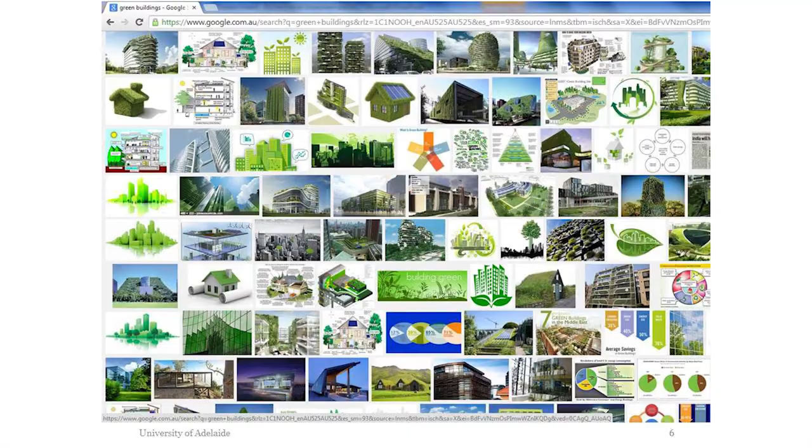But the interesting thing is, once I click images, of course, everything turned green. And you see that people say, okay, if you put plants on your facade, that is called green building. Anything green is green building. Well, is that so? Is that really what green building means? I believe that most of you probably are aware what sort of area the term is referring to. So I guess the idea of building something that is responsive to the environment and creating spaces that are suitable for occupants without leaving much negative impact on the environment is not really anything new.

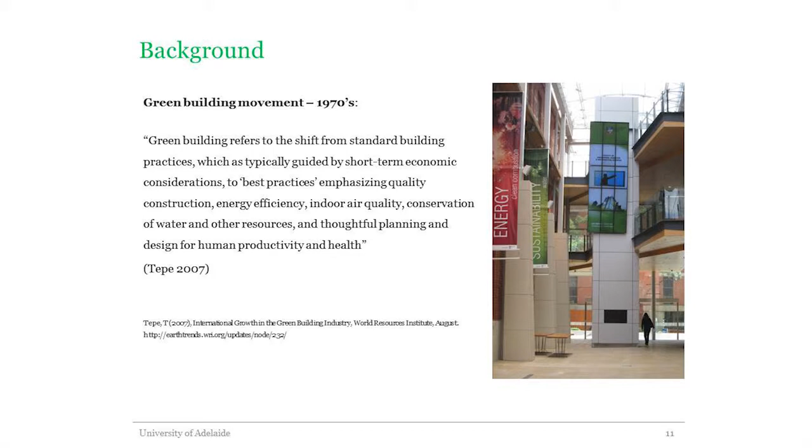At around that time came a realization that if we don't try to minimize the need for oil, we could suffer. And the green building movement started about the same time, when a number of countries realized that unless we change the way we build, there's a lot of impact on the environment, and we keep needing more and more oil.

So the idea of green building is really a shift from standard building practices, typically guided by short-term economic consideration, to best practices emphasizing quality construction, improving energy efficiency, improving indoor air quality, conserving water and other resources through thoughtful planning and design for human productivity and health. So it's not just about building with plants. I think it's more holistic than that.

It's looking at the life cycle of the building, from construction to use to demolition to reuse, by considering environmental and social impacts. However, I personally would say it should not be just environmental and social impacts. Economic considerations should also be put into the equation. And that is probably one of the debates: is it really green if we do it at all costs? My answer is, it should not be.

But to reiterate, green building is a label applied to a building that is designed, constructed, and operated in a way that uses resources efficiently and reduces negative impact on the natural environment while providing a healthy condition for the occupants. So the occupants are as important as the impact on the environment. It's not just about reducing the impact on the environment.

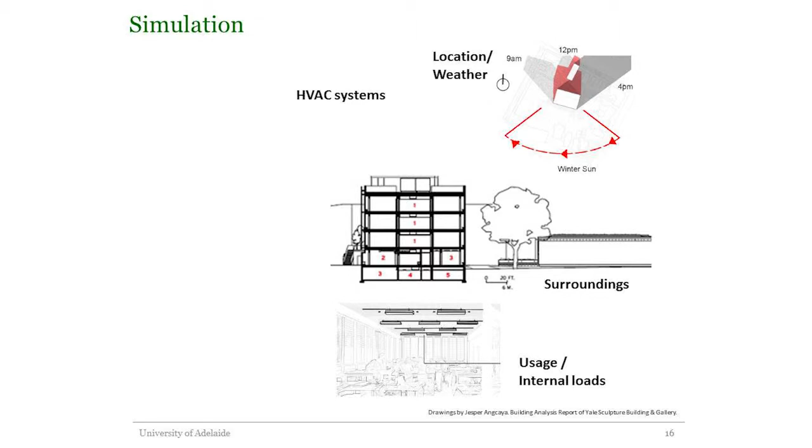You need to tell the simulation program where the building is, because that brings the weather information, because how a building performs depends on the weather condition. The surroundings, so you have to know whether it's surrounded by other buildings, by trees, is there any road around it, water bodies, and so on. You need to say what the building will be used for, how many people, lighting, equipment, anything that is affecting the internal condition, materials around the building and inside the building, so the building envelope and so on.

And if the building uses a heating and cooling system, then you also need to say what system is being used and how they are going to use it. All of these will be taken into account in the prediction. Then you can predict, based on all of these parameters, what is the condition in the building, if they need to be air conditioned, how much energy will be used for heating and cooling, how much water will be used, and so on and so forth.

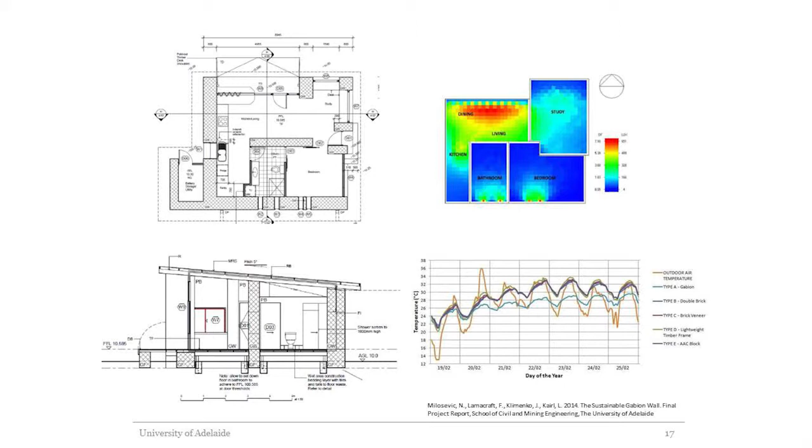Just as an example of a simulation. This is actually a student project. I think the owner of this work is in the room, so thank you for letting me use this project. This is a group of honours students from architectural engineering recently looking at using a Gabion wall for a house. Is it possible to use a Gabion wall for a house? Using simulation, they can predict the temperature in the house, lighting level, all sorts of other things. That's an illustration of what can come out of the simulation, and you can compare different kinds of materials.

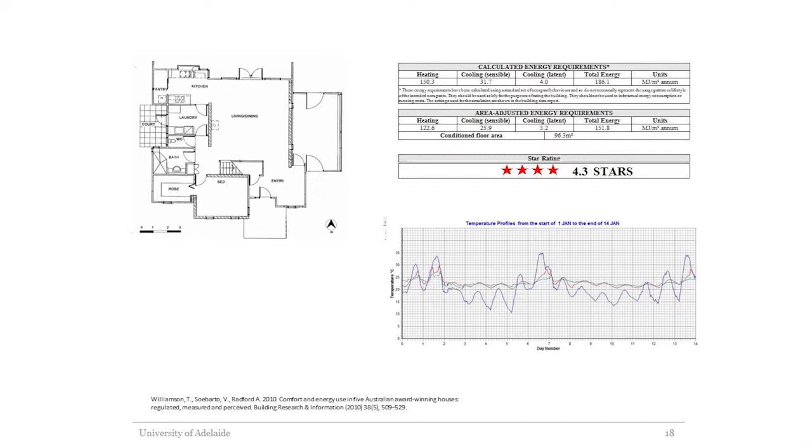The rating that I mentioned before, if you look at the actual output, it looks something like this. You enter all these building properties and how it's used, and it comes up with the predicted heating and cooling load, and it gives you the star rating. The star rating is based on a band of 1 to 10. It has certain values, then it gives you the star rating. Also, you can predict the temperature in the building if it's not air conditioned.

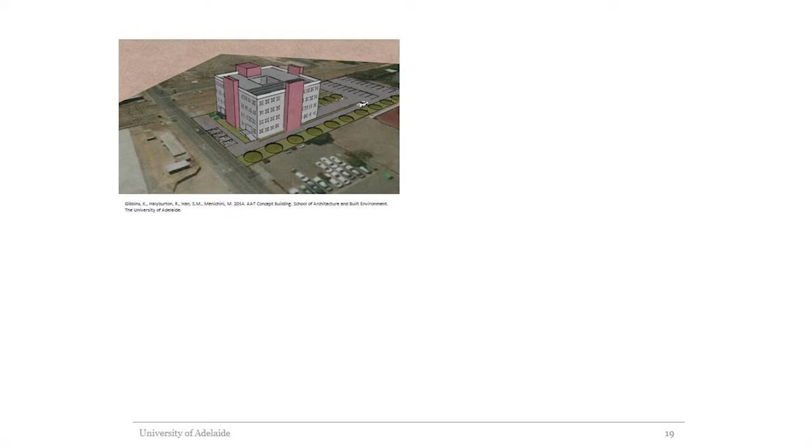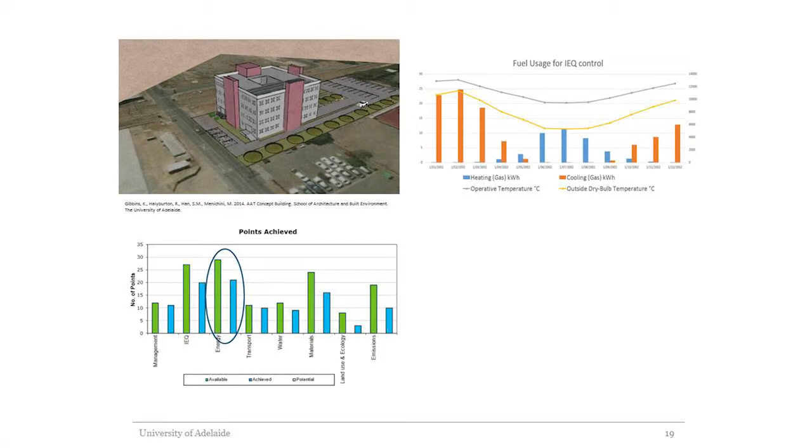In a commercial building, you can also simulate a similar thing. Once again, this is a student project from last year where they simulated an office building using a program called DesignBuilder. What you can predict, for example, is monthly electricity and monthly gas use. This will then be used to predict the Green Star rating performance. Now, Green Star, just quickly, is not just about energy. There are other aspects that are assessed: management, indoor air quality, transport, water, materials. But energy does play a big role.

So the simulation is fed into the Green Star rating, and with all of the other assessments, a building design will be awarded a star rating, whether it's 5 or 6, 4, and so on. So that's it in a nutshell. Once again, all of those star ratings that we heard about are not real performance, it's predicted performance. So we are interested in looking at, is predicted green the same as actual green?

About 2 years ago, one of our PhD students conducted this research. Now, studies confirming the greenness of claimed-to-be-green buildings are not new. There have been studies around the world, and the outcome is not conclusive. Sometimes they find green buildings perform better than non-green buildings, sometimes not. This study is the first in Adelaide, as far as we know, to look at the performance of Green Star rated commercial office buildings and conventional buildings, which are not Green Star rated. But because there are a lot of factors in Green Star assessment, there's no time to look at every single one.

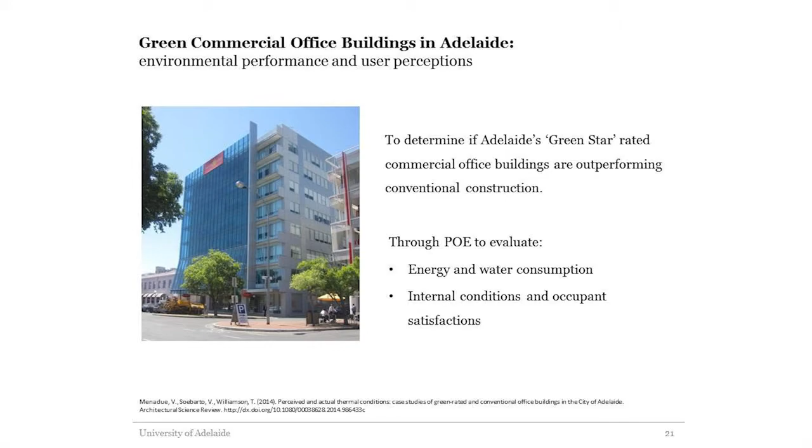The study focused on the energy and water consumption, as well as the indoor air aspects, and as well as the occupant. Because once again, if you remember the definition of Green Star, green building is not just about the environmental aspect, but social aspect is important. So she looked at also the occupant satisfaction. The work was done through monitoring. So there's monitoring of the indoor condition, temperature, humidity, lighting, actually also noise level.

Looking at 4 conventional buildings, 4 Green Star rated buildings, and 1 green intention. Now you probably say, gee, that's not many. It is a big challenge to find buildings that wanted to participate. Letters were sent to many buildings, and not many wanted to, I suppose, be known how the buildings actually perform, possibly. But also they don't want the occupants to be disturbed by the study.

We were helped quite significantly by the Department of Premier and Cabinet, which was very helpful. And we had 9 offices participate from the government, and they all, luckily, were in conventional buildings as well as Green Star rated buildings, so we had a comparison of that. There is one building called Green Intention. Now this one was a building that was perceived or looked like it's kind of green, but it's not rated officially. But from publications about this building, it seemed to be green, quote unquote.

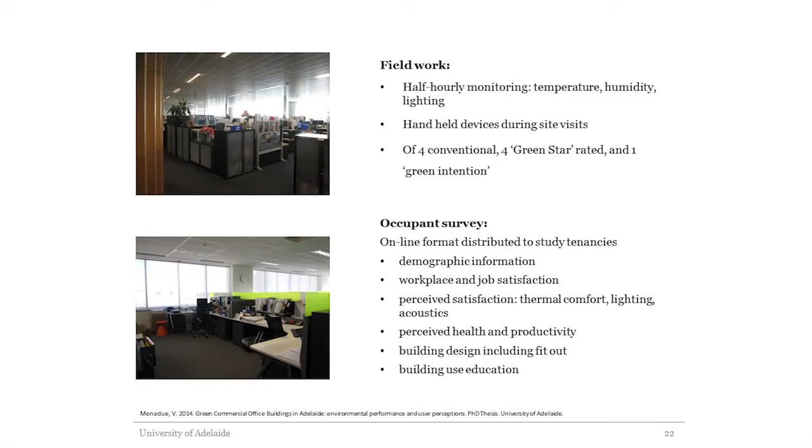Once we gathered the buildings that were willing to participate, then she conducted the occupant survey. More than 600 people participated, so it's quite a large number of people. And basically, the questions included job satisfaction, workplace, perceived satisfaction of comfort, lighting, acoustics, health, productivity, building design, as well as building use education.

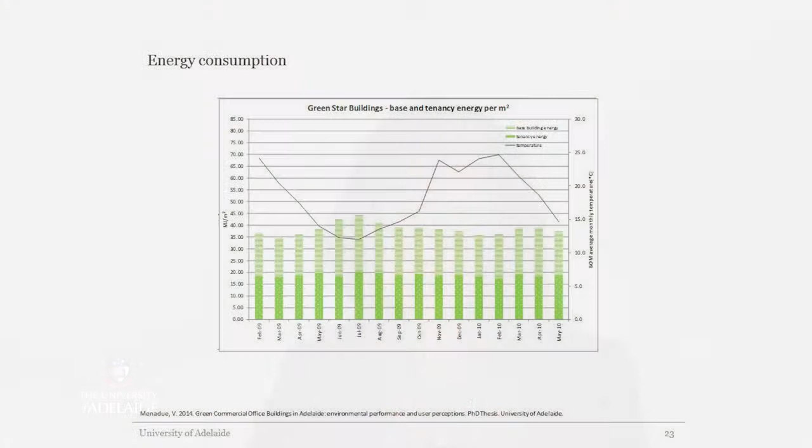and that's the Green Star rated building. So it's quite pleasing, I suppose, to see that the Green Star buildings use approximately half of the conventional building. The line plot is looking at the temperature. So as you can see, when the temperature is quite low, which is the winter, that's when apparently the higher energy. We'll look at this data in a different way. So apologies to those of you who don't really like Excel, but we like Excel.

And it was the same with the green building, but once again, as you can see, it's half of what we found in the conventional building. But similarly, total energy consumption is actually higher in winter than in summer. Interestingly, the green intention building was not too bad. I mean, it's only slightly higher than the Green Star rated building, despite the fact it's not officially rated with Green Star.

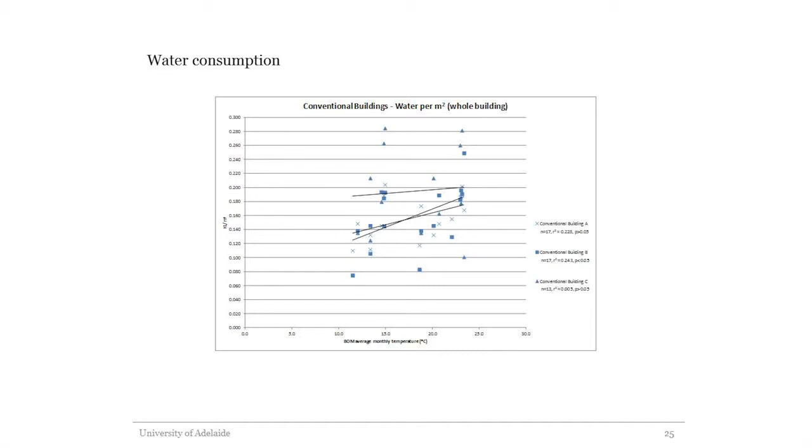And then we look at water, same thing. This is the water consumption in the conventional building, and the Green Star rated building also uses less water, showing that the water is more efficient also for the cooling season. So often water is used for the cooling system, but in Green Star buildings they use much less. Interestingly, the green intention building has less water per square meter, and in this building water is not much used

for the cooling system. Okay, so in those two aspects, we could confirm that the Green Star rated building actually performed better than the conventional buildings. Now look at the people's perception. There are many aspects of this, so these are just some of them. The report actually goes pages after pages, and I just picked some of these.

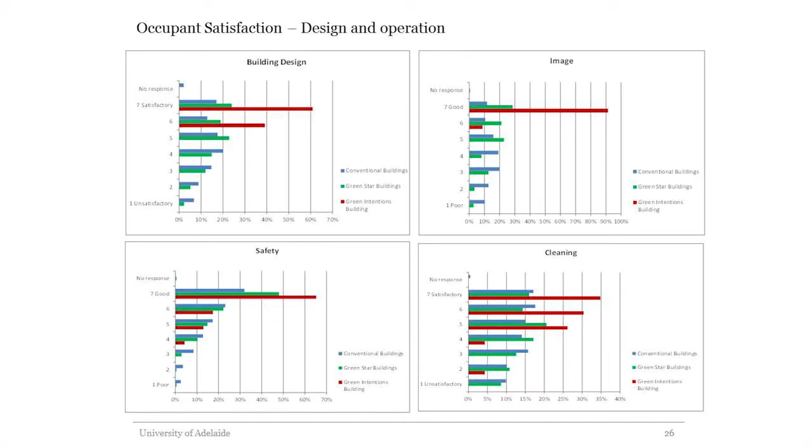So in terms of building design, the scale here shows unsatisfactory as the lower scale, and then 7 is actually the highest or the most satisfactory, or the good and the poor. The green indicates the green building, the blue is the conventional building, and the red is the green intention building. So in terms of building design, overall, the response that the building is quite nice and we like the building, we have a better response for the green building.

So occupants in the green buildings feel that the building is more satisfactory in terms of how it looks, how they use it, and so on. It has a better image and also provides better safety. But once you look down here, for some of them the conventional building is similar to the Green Star building.

Interestingly, in terms of cleaning, most of the occupants in the Green Star buildings don't think that the building is as clean as they wanted. We don't know why, but the conventional building seems to perform better in terms of the cleanliness of the building.

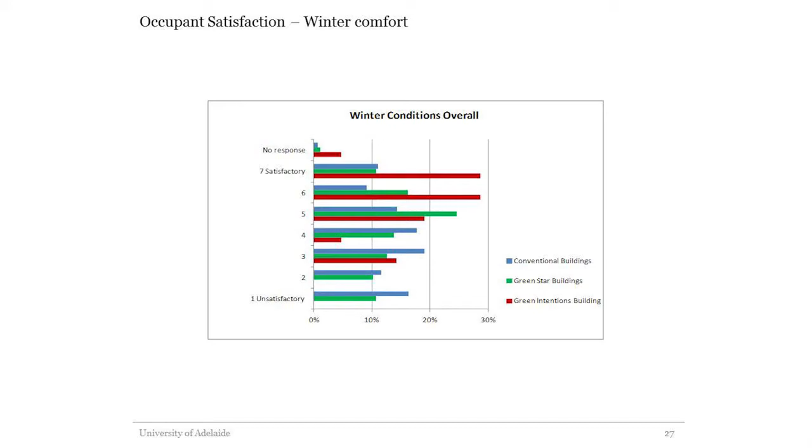And then we look at other things, for example, the winter conditions. In this case, we found that the satisfaction is kind of similar. So if we look from the 4, which is the middle point, and above, the conventional building performed better in that score, as well as at 7, but between the 5 and 6, the Green Star performs better. So if you total it, it performs relatively similarly.

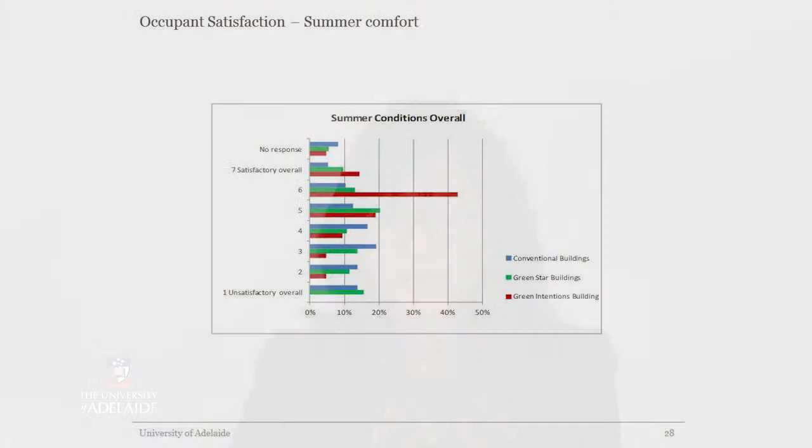Summer, however, the Green Star rated building performed better. So people perceive the summer condition in the Green Star building as better than in the conventional building.

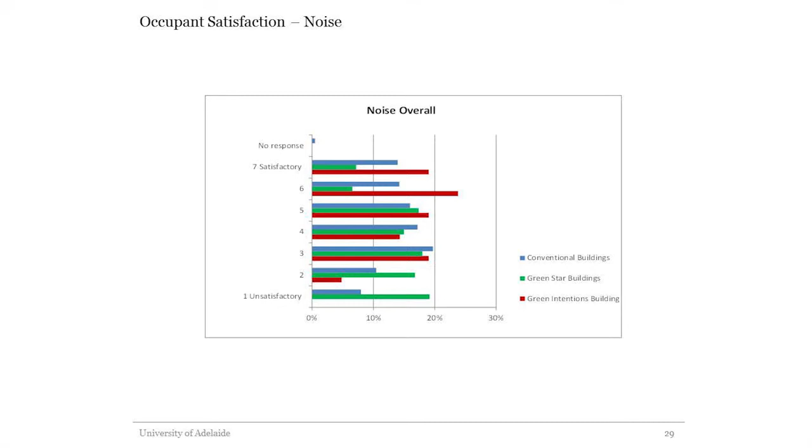Noise, however, is a big issue, and this is not unique to the findings in the Adelaide study. Studies around the world show this for a lot of office buildings under schemes similar to Green Star. In America, it's called LEED. In the UK, it's called BREEAM, a similar scheme. Noise is often an issue in Green Star rated commercial buildings, and that is because most of these buildings try to minimize the energy for lighting. What happens? There are big windows and fewer partitions. And when you have fewer partitions, office buildings tend to be quite noisy.

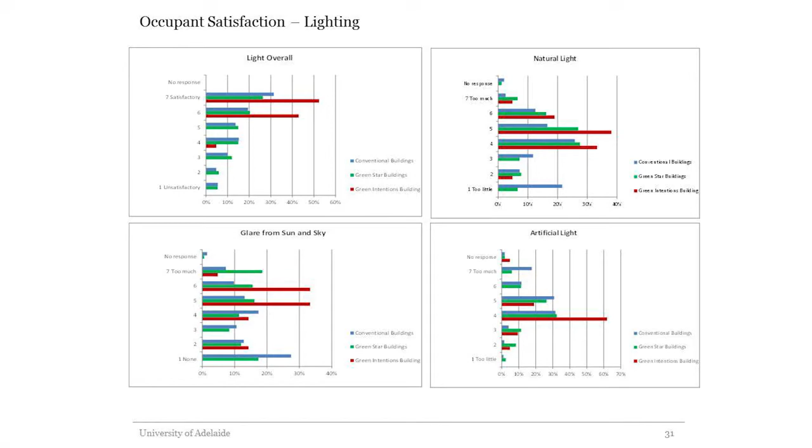I kind of skipped the green intention, but as you can see, the green intention buildings perform basically the best in terms of the occupants' satisfaction, which is quite interesting. In almost all areas they are more satisfactory than the other two, despite the fact, once again, it wasn't rated officially through Green Star.

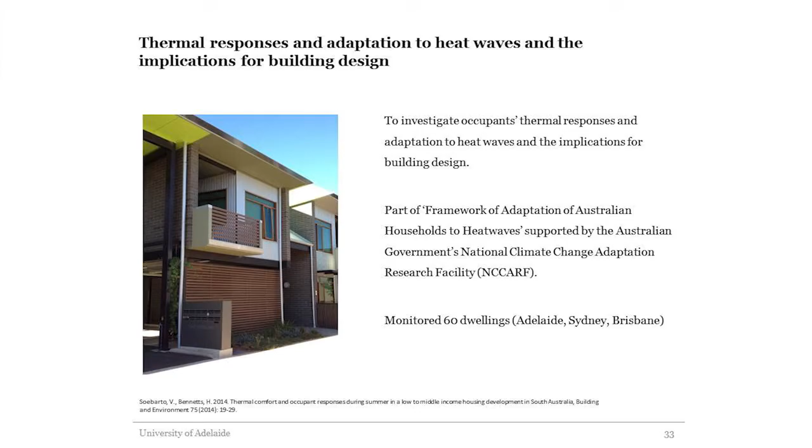So then we look at another example of this, looking at the actual performance of a residential building. This is one example project, part of a project with the University of South Australia in developing a framework of adaptation of Australian households to heat waves. It's supported by the National Climate Change Adaptation Research Facility. In the overall project, we monitored 60 dwellings: 20 in Adelaide, 20 in Sydney, and 20 in Brisbane.

In this particular example I'm discussing here, we look at the performance of the smaller dwellings that we monitored. It's a housing complex for low to middle income people. It's quite a simple design with one living kitchen area, 2 bedrooms facing the north side. This is the living area. It does implement a lot of good design principles, and it has been rated with the NatHERS rating tool. Overall, the whole development has 7.5 stars, which is the minimum that development required. This particular one had 7.4, but it's pretty close to 7.5.

The idea of this design is it relies, if it could, on natural ventilation. It's got what we call stack ventilation. So there is a chimney up here. I hope you can see that. I can't really see it, but there's a chimney up here where the idea is if you open this opening, it would draw the hot air up and then induce ventilation. It does have air conditioning, but it's only installed in the living room. So once again, the building has 7.5 stars.

So what did we do? Apart from monitoring the condition inside the building, we also asked people to respond to what we call a thermal comfort survey. The difference from the previous study is that in the previous study, we did not ask people to say what they feel every single time. It was an overall comfort perception for the whole season, whereas this one is as often as we would like them to respond. The survey asks which room they're in, what they feel at the time, so hot, warm, cool, cold, and so on, whether they want change, whether any window is open, air conditioning running, and what type of clothing they have. We do this either on paper or they can also do it on their mobile phone. We send out automatic reminders and they receive a message and just answer the survey.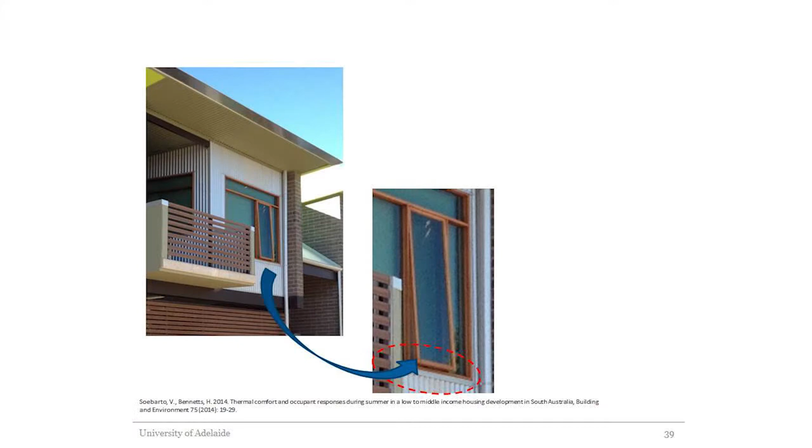So when we did simulation, we found that if this simple design is done differently, let's say the window is casement and you can open it totally, the number of hours that people would feel warm can actually be significantly reduced, even up to 40%.

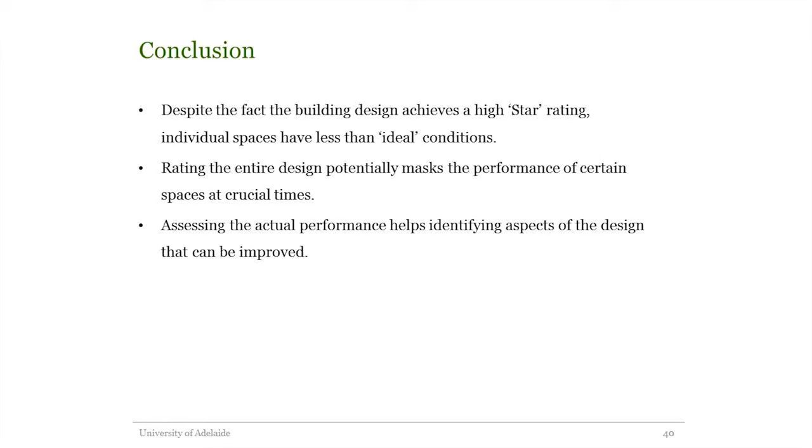So once again, what we find is, despite the fact that the building design achieved a high star rating, supposed to be a representation of the greenness of the building in terms of energy, individual spaces are actually less than ideal. And rating the entire design can potentially mask the performance of certain spaces at crucial times. And once again, unless you actually look at the performance of the building, how green is green, we probably don't know. But when we assess the actual performance, that's when we can improve the performance of the building.

Now, I haven't talked much about the building materials, the construction, which is another aspect of green building. Currently in the school, our head of school, George Zillante, is finishing a project looking at construction waste, which is another big area. So often, once again, we look at the greenness of the building from one aspect and forget one thing, in this case the occupants, but also the making of the building itself is often not included.

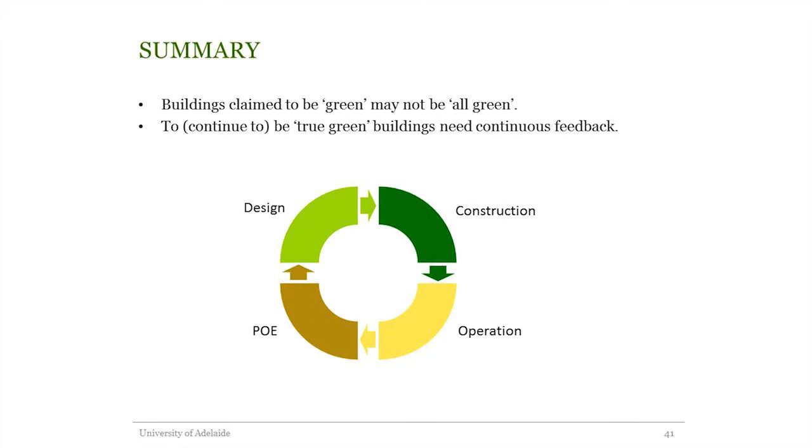So my perception is not all buildings that are considered green are really green. It depends on what measures you use. But to continue to have true green buildings, I think we need to have continuous feedback. And that's when post-occupancy evaluation is very important. Otherwise, we don't know exactly what happened.

The problem is not every building would like to be evaluated. Not every building owner would like to know, or maybe the designer doesn't want to be found out if their design was not as good as it was claimed. It is a big challenge. However, I think our role as researchers is to be critical about what's out there, and through that, hopefully we can contribute back to the design community, to the building community, so that these findings can be addressed for new building design. That's all from me, so thank you for coming.